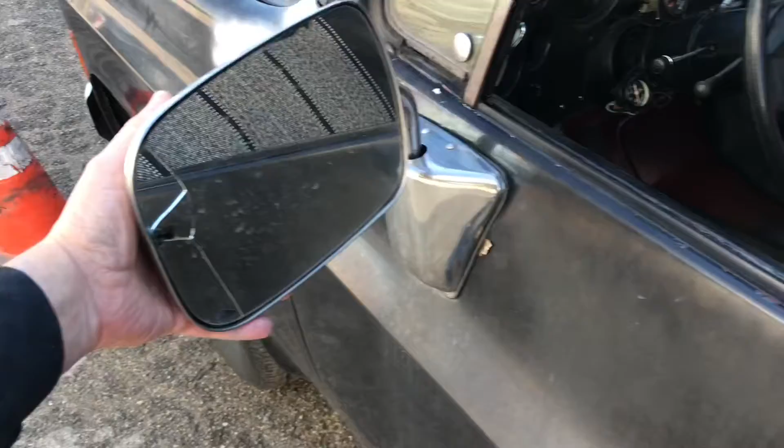Get this sucker back in, wired up properly, and test it out for shimming. Alright, let's record the back of my head.

I remember, did I take all this off up there? I probably did. Let's see. I think I can do this one.

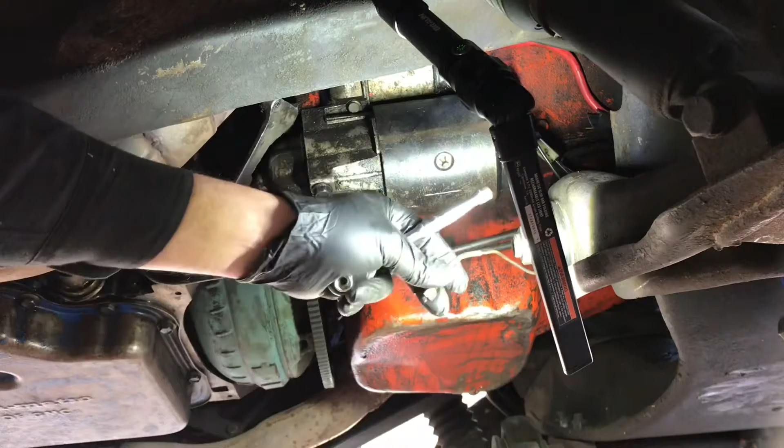There's the wrong wire I did. So this is the one we're not using. This is the resistor wire, we're just going to cut that. Apparently I don't need it. Allegedly you don't need it. And we'll see. Well, we shall see.

Look at that, nice. Alright, those two are off. The one I can't get to yet, so I will drop this first.

Transmission lines need to be adjusted. See, this got the nice knurled. Where's the lens? You see how they got a nice knurled, of course you can't see it, it's pitch black. Right here is knurled, so it's, they do that for a reason so they stay tight, I think.

This sucker's quite a bit heavier. Oh, I think I left enough. Yeah, I can get down here to take everything off. That's the best way to do things, leave enough wire for yourself to do stuff. Fuel tank was the same way. I should have done it this way. There's enough hose.

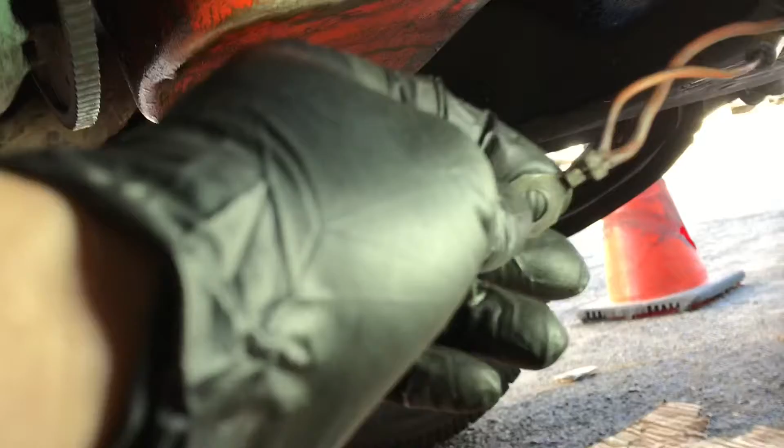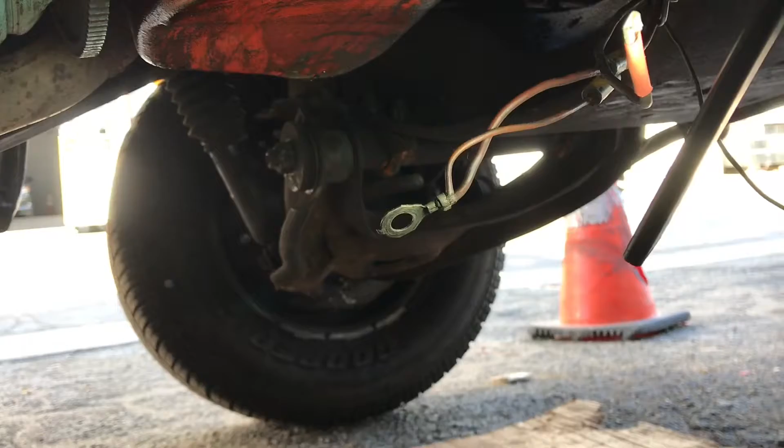Alright, that's on there. Oh, I gotta shrink it still. I've taken this off so many times. And look at this, it's with fusible links. That one is barely hanging on. So I'm gonna crimp on a new terminal there, so I don't do this next week. No start. Alright, let's bring the thunder, as they say.

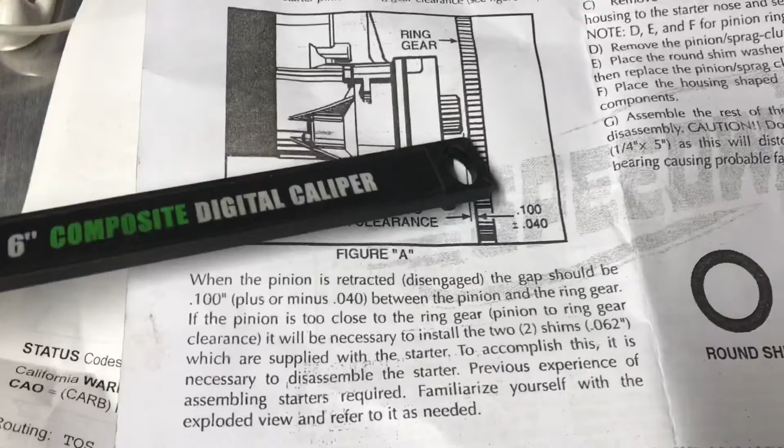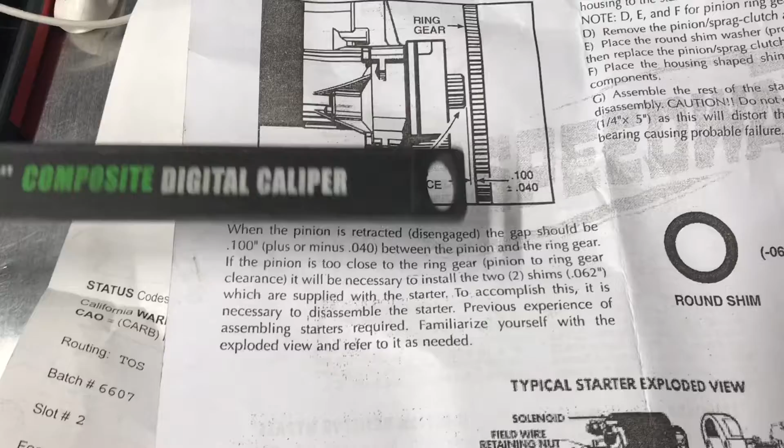I'm going to make another shim out of that piece of aluminum I got. Well, I was hoping I wouldn't have to do this, but my clearance between here and the ring gear is a little bit bigger, I think it's 0.10. If you measure it on here, 0.100 plus or minus. I don't know, maybe it's. I'm going to shim it because either way, the gear's coming all the way out to the end of the flywheel. I'm going to look at another install video.

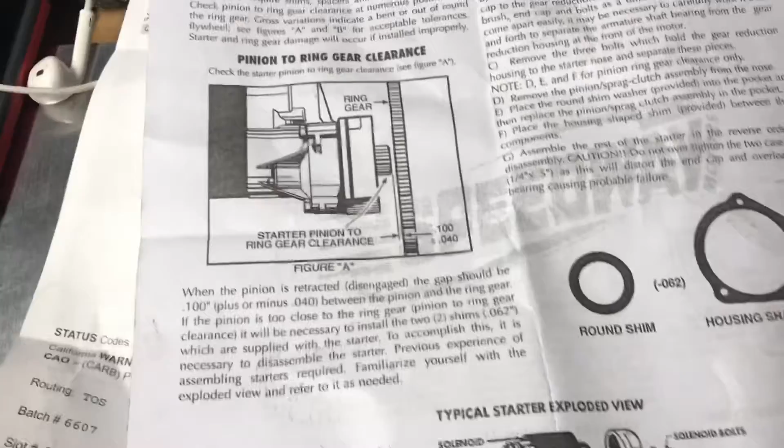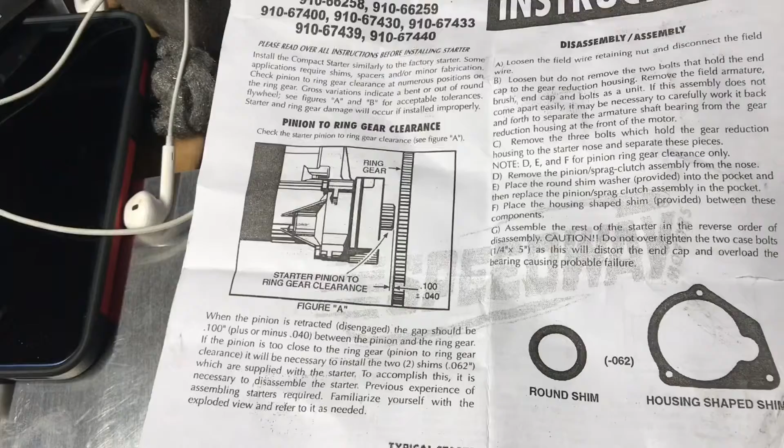You don't want it to be fully engaged like that, and it sounds like mine's hanging up. So I'm going to do that first because I want to do that first and then do the other shims anyway, I just jumped to these. I put in almost 0.17, 4.3 millimeters, that's a lot of shims.

So that's not right, way too many. So let me try and throw these ones in. I'm going to take the starter apart to do that. They go in between here. They give you a slew of them. 1, 2, 3. I don't know if these are any.

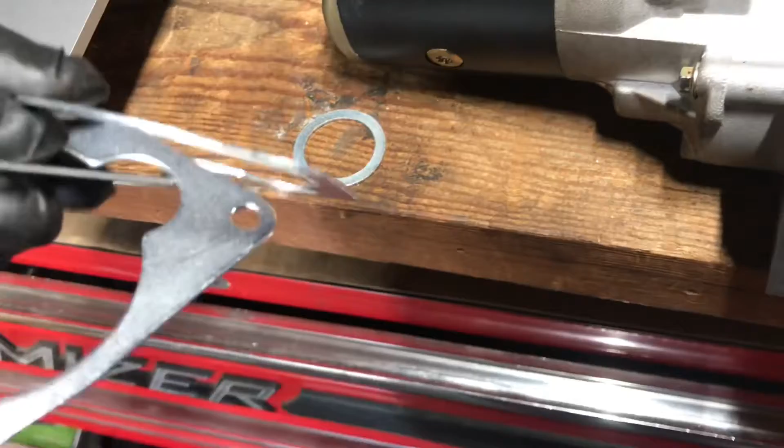Are these all the same thickness? Yeah. Another video said 1 and 1, round on both. Let me see what their notes say. Remove the 3, remove the pinion. Place the housing shaped shim.

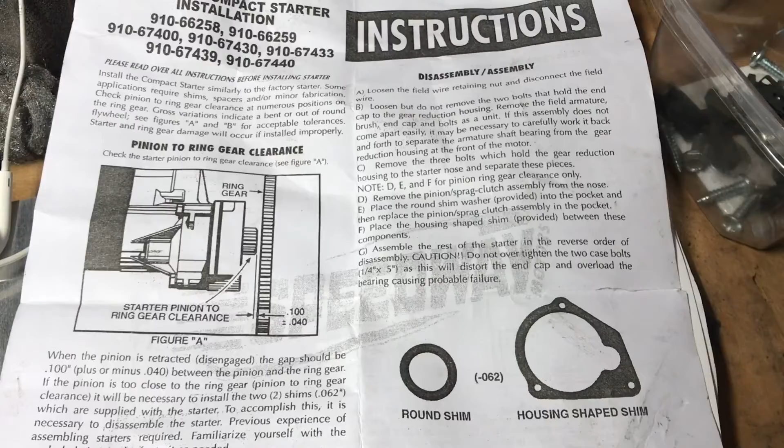Yes, 1 shim maybe? Okay, alright, let's see what this does. This is how awful these instructions are. It's telling me to loosen these bolts and pull the armature out. There's no reason to, I just need to get to this section. So nothing is touched there.

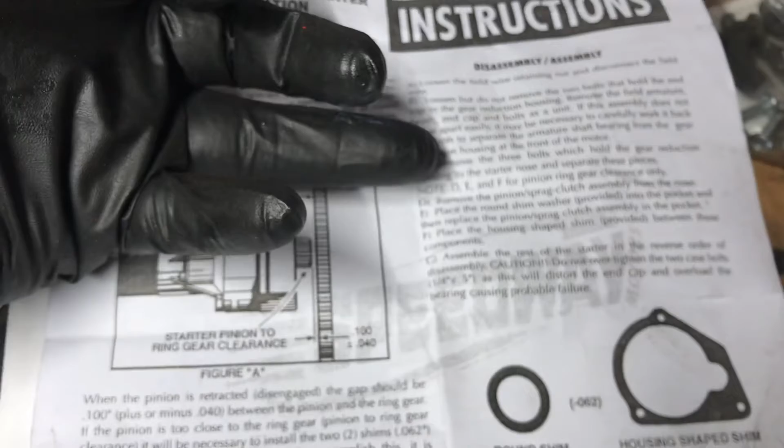I'm putting in a shim right here. There's already one there, they want another one, and then another one here. But if you read their instructions too, they want you to take the gear reduction housing and pull out the sprag clutch and put it behind there. Well, if I pull that out, it doesn't fit behind there. There's a bearing and it's not the same.

These people... but I watched a competitor's video. Yeah, they're just doing this one and this one.

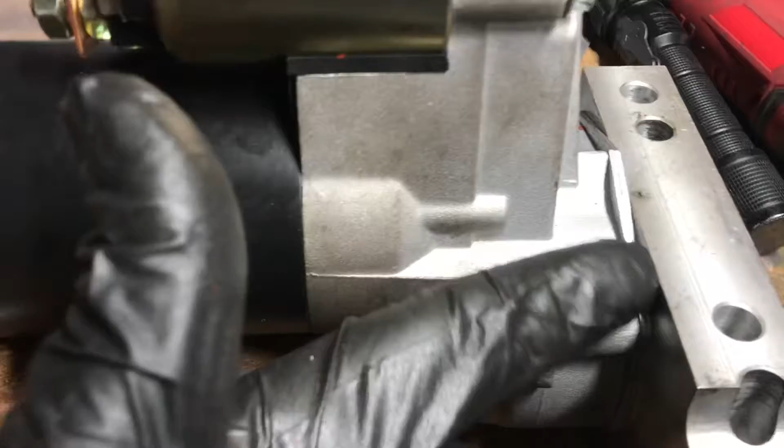That's all the way out for me. Before it was coming right to the end, now it's getting hung up like that. Should it stay there on its own? They're saying to pull it out, and then they want you to check the gap.

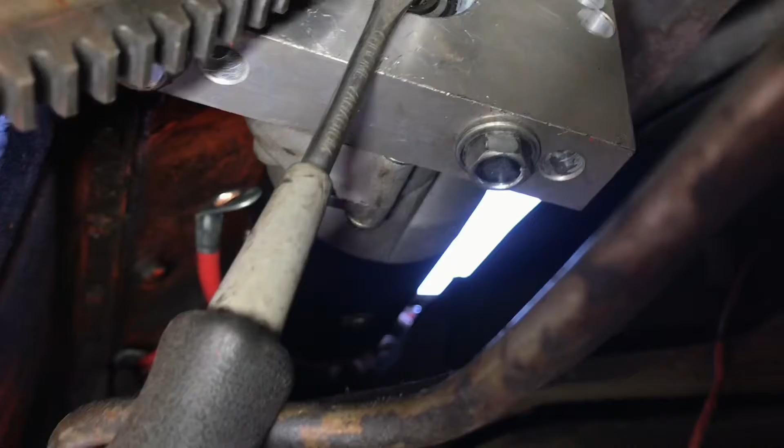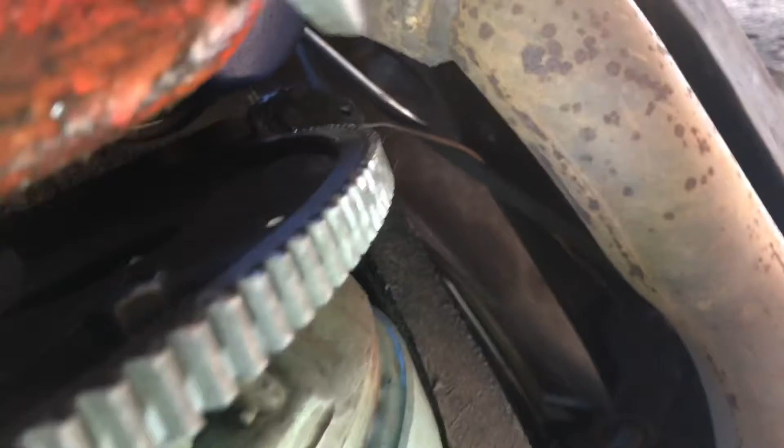In there it should be like 10 thousandths, they said, or one other site has you put a paper clip. I don't like how that... I had to watch how hard this is to get into gauge. If it comes out at an angle here, see if I can do it. It kind of hits the flywheel, and I've already done a couple teeth damage shimming this.

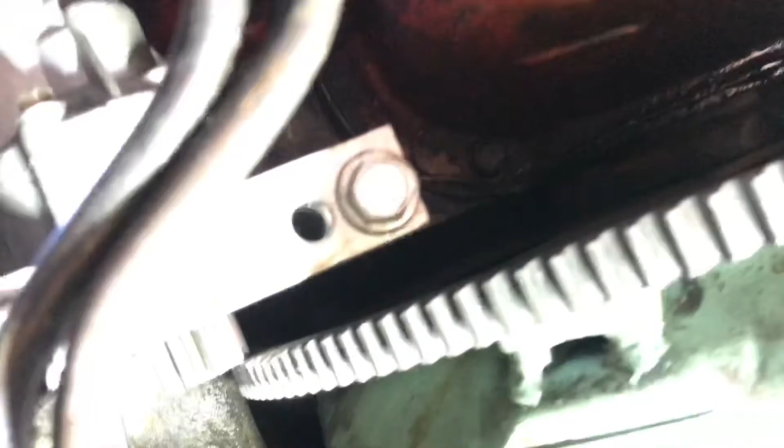So let me, I don't like that. See that? Clink. That's, I mean it's gonna come out spinning. I guess that's the idea.

Let's see, I've never had to deal with this. I feel like that's gotta go. If it comes down, it's going to be away from the flywheel more, huh? I think that's what it is. When you're shimming, you're adding shim.

Let me rotate you guys, sorry. When you add shims, because where it is, you're right on the 3 o'clock position. You add shims, you're coming down to like 4 o'clock. Am I correct in thinking that?

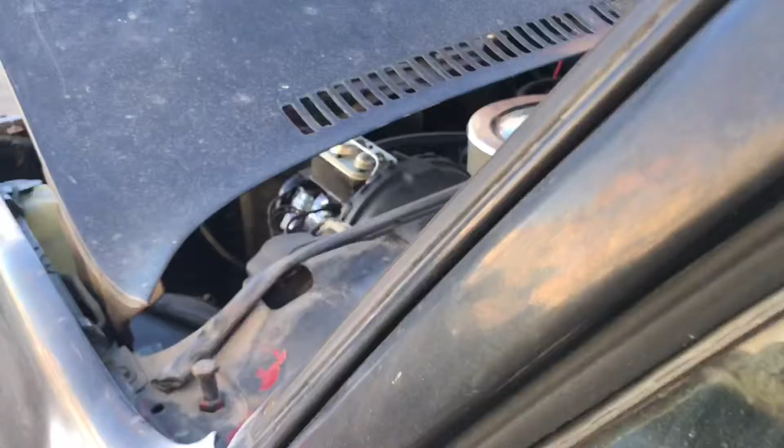So I can't take any away. There's no shims right now, and it's right there. Let me put in 1 shim, see what happens. 1 shim. Alright, 2 shims. No shim.

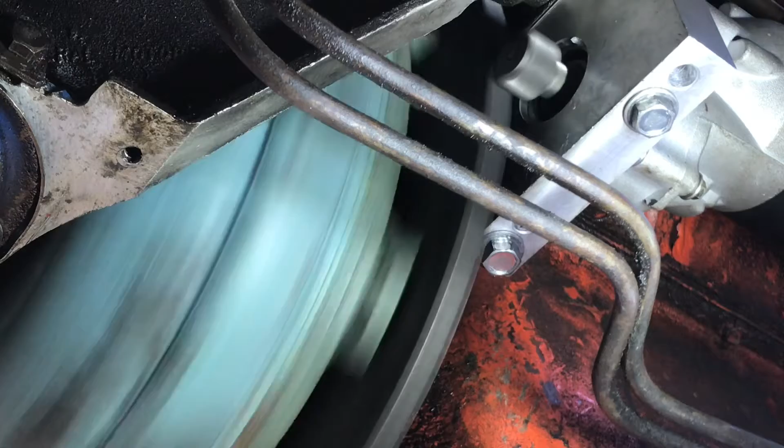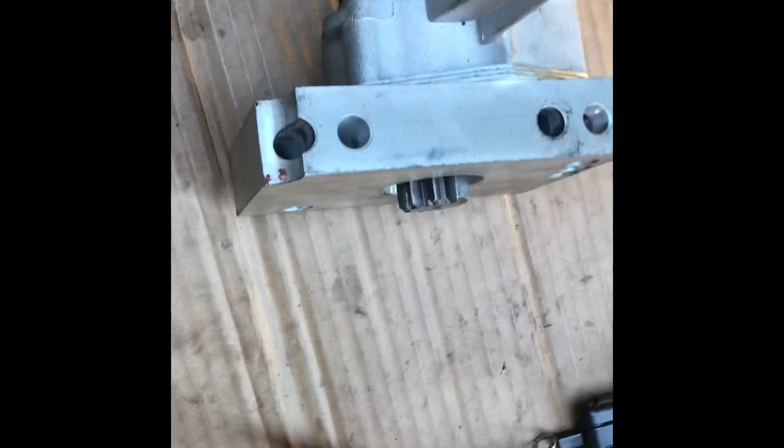Okay, I'm gonna roll a little video. Got 3 shims in there. One more shim in here. Had on stock, added 2 now, plus the circle inside. And because we still were coming out too far, I think. So let's see, straight shims, just

Depth shims. Be one straight shim. Good boy. Two shims. Yeah, how about 3 shims? All the shims I made. It's just as thin.

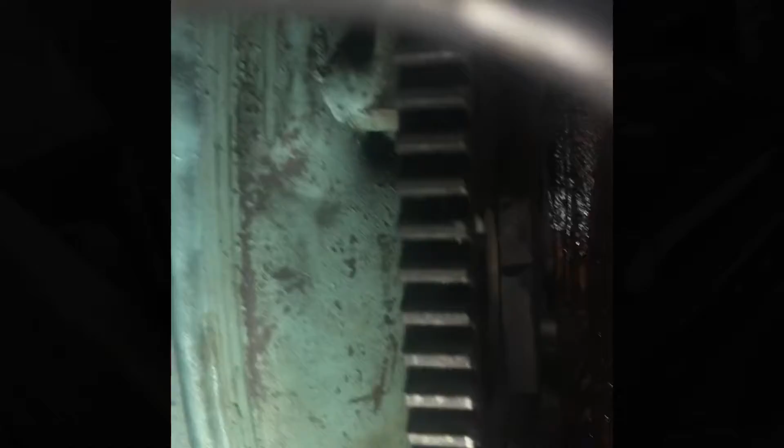Let's see, the way this is drilled, I think the whole starter has to go that way, in my opinion. So when you kick this out, so I can do this. No matter what you do, it hits. And I'm bringing it down as far as it'll do.

A ton of shims. Should it sit there by itself? Come down, I need it to be like down here. Way down here would be less engagement. That doesn't make any sense though now.

And look at it, I keep adding, that still comes out the same. I added a ton of shims here. Mechanism there, and it still comes out as far. It should be coming out. Maybe it only comes out to there. I should roll video, see how far it comes out. Yeah, let's do that.

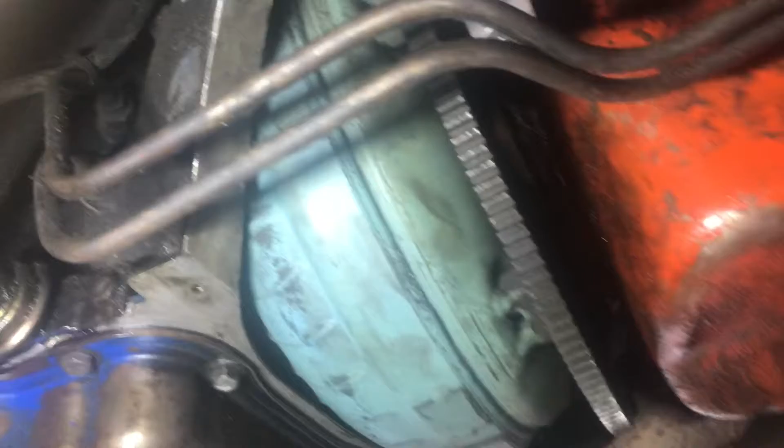I don't know, I've done starters many times in my life, never one of these high torque things though. Usually you throw a couple shims in, you're good. It seems to be getting hung up. It's coming out, it's not retracting once it's running. My flywheel does have a little wobble to it.

If you guys notice that, is that going to cause that? It seems like the starter's not retracting. I think it's just momentum. It has that sprag gear, kind of worm gear that comes out, engages, and then once it's running it's supposed to kick it back.

Seems to be coming out into the teeth enough. I think I got that shimming right. I got so many shims in there, you can't go any further. Let's see if you see. There's that, and right there. That's way too many shims. Way too many.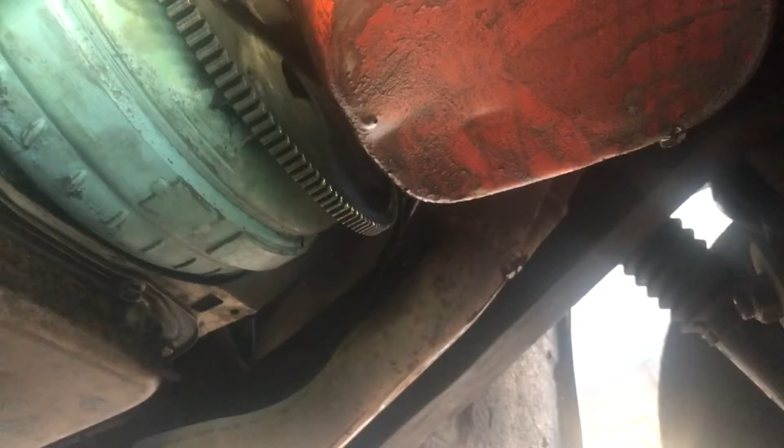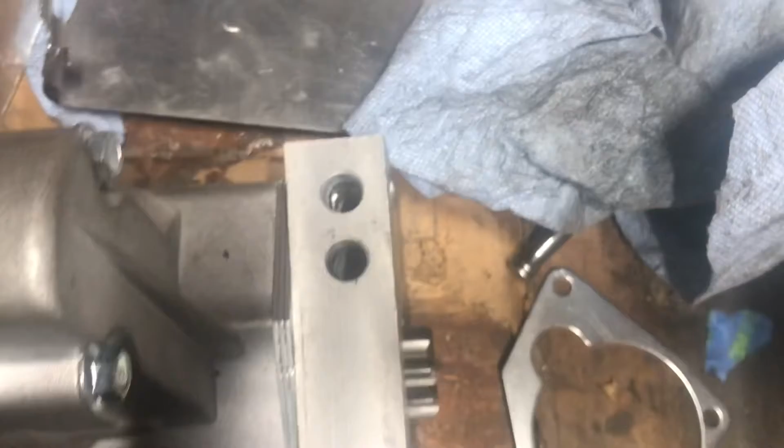Oh boy. Could be something, I'm just saying it seems like it's going to come over. Starter's up in there, it's going to come away from the flywheel. And that would be the opposite side. See how these are shadows, Jesus Christ. Looks like it was supposed to be drilled over here more.

It's definitely got a mark over here on both of these. Is that just the way it is? I don't know. Well, let's see, if it was drilled, that would give me more clearance into the flywheel though. I want out of the flywheel.

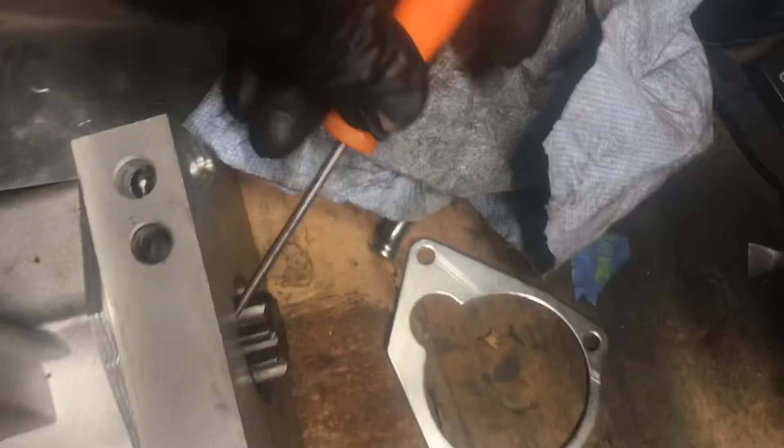Because she's coming out, I just put jumper cables to it on the ground and it spins, comes out, spins, comes out.

Wiring in my truck, would it hold it up? That R terminal wire I left off? No, that's just a feed for the coil.

Yeah, losing daylight again, probably be putting the other starter right back in. Oh, jeez.

Old starter sitting on the floor, needs a hammer. Ay, ay, ay.

Old starter on the battery charger. Wait for it. Old starter on the battery charger in the 50 amp start position.

Jesus Christ. Old starter rapped on the solenoid. It works, video.

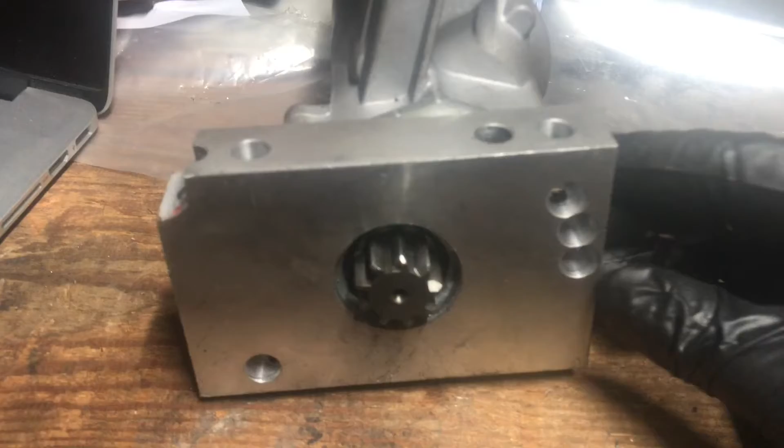Well, I don't know, the old one doesn't get hung up. But we do know this is coming out. I think it's just in the wrong position, it's got to be like a hair over. And by shimming it down, you get the curve of the inner curve of the flywheel. So it starts here and you bring it down, you're getting further away from the ring gear.

But I have it down like twice as thick as those shims right there. Even, I got a lot, way too much. They used to make, I had one, I cut a piece of aluminum, and then I had the shims that came with it. And it measured out to, what did I tell you, 1.7, 0.17, and I think I even went thicker than that. That's not a shim, that's a wedge. That's 4 millimeters, when we know what a 5 millimeter socket looks like.

I do kind of remember GM's having a thick shim though, but my starter didn't have it. Obviously, I had the diagonal bolt pattern too.

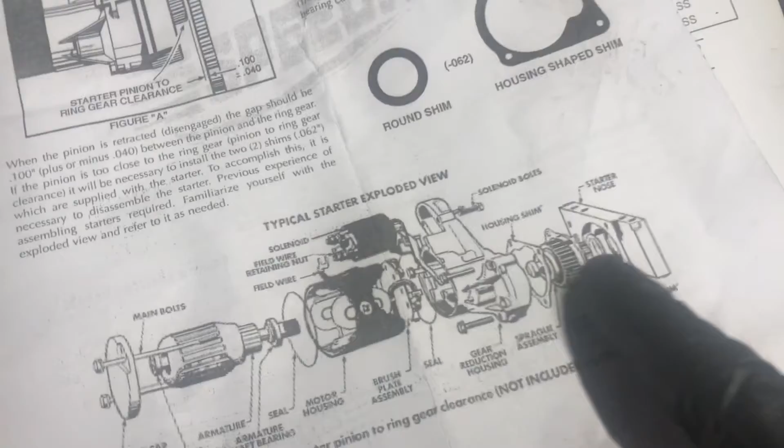Totally forgot to mention, I was on the phone for 40 minutes with them on hold, just wanted to go over their awful instructions. I told you, you don't need to take the armature out, all you had to do was take this end off, and they clearly state that in there. And then they tell you to take the gear out here and put the shim behind it. You can't, the shim goes in front of it. It's like...

I don't know, bought some stuff from before from Speedway, but that's my honest opinion.

It's just not in the right position, it's got to be further down on the curve of the ring, because it's getting hung up on the return, it won't kick back in. And you can pull it out and put it into the teeth and feel that. The flywheel's kind of almost at an angle.

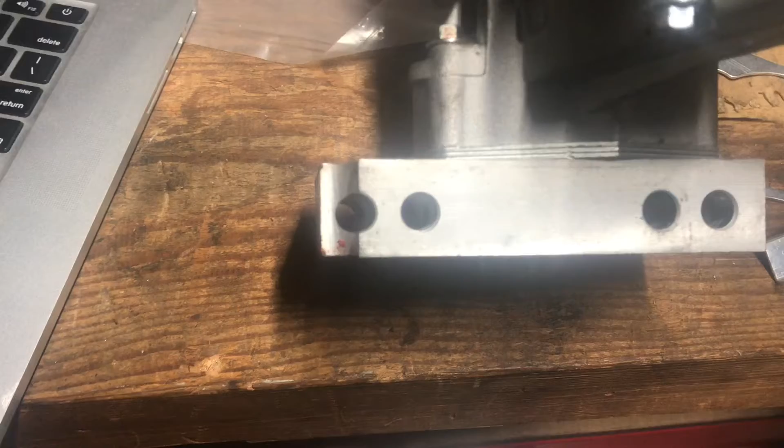It's like, are these holes? My holes were drilled in the block, I had the one original. Maybe if that one's in the wrong position, maybe it's cocked in a little bit. I think it's factory drilled though, they do mention you can drill it yourself. Did somebody do that? I don't know.

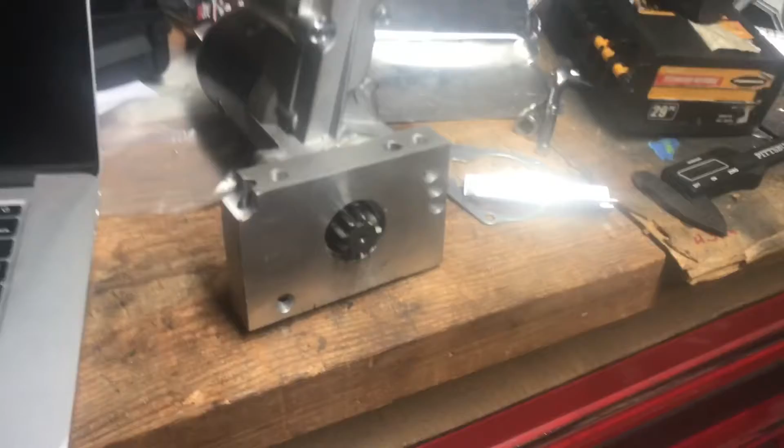Anyway, old starter's in. That's a high torque, the old one anyway, but needs a new one. Maybe I'll email them, send them video and pictures. Say look, I tried to call you but you're not very helpful. Ooh, let's see what they say to that.

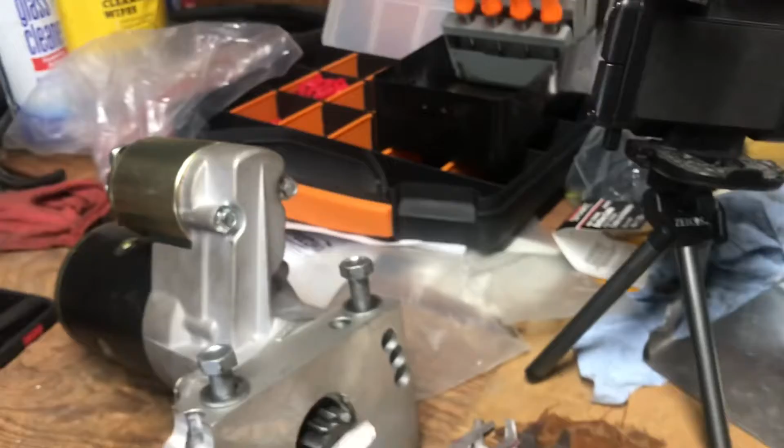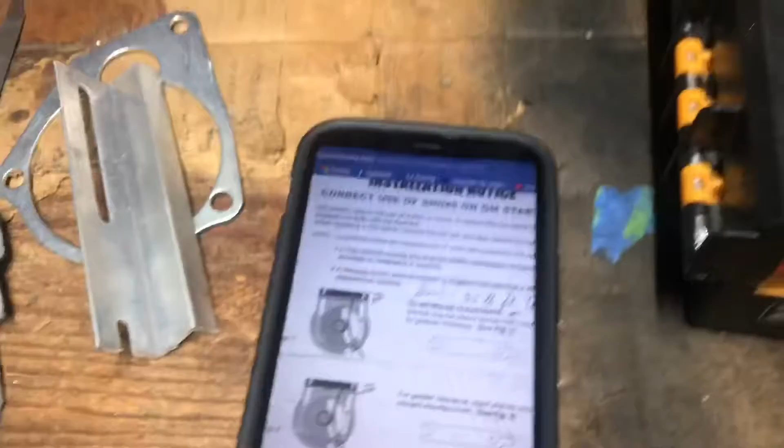What we're gonna do is, I found this little tidbit on the internet, let me see if I can find it for you. But something I never had to do in all my years of shimming starters was making a half a shim. This was on some Chevy nerd website. It says full shim there, that's not my issue, I need a half a shim, like that.

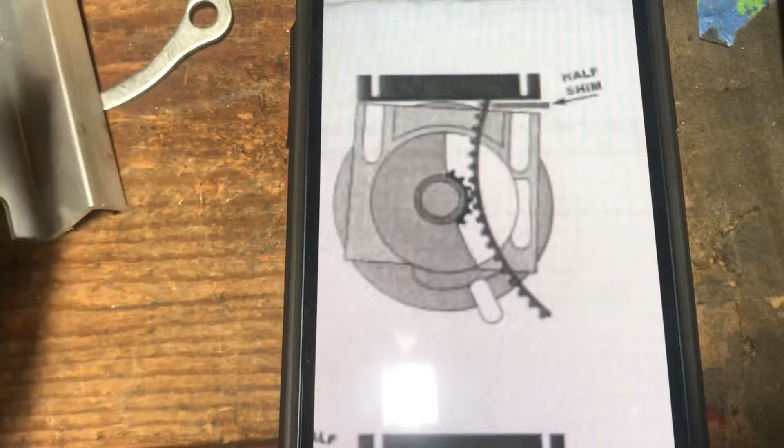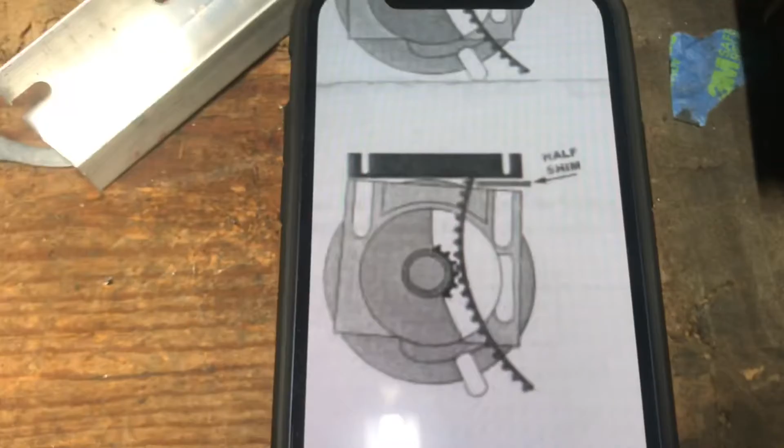I need to bring it away from the ring gear. That's what I was trying to show you guys yesterday with that curve. Now I don't like that because look right there, that's not a good seat for the starter. But I mean, if you're dealing with a fraction of an inch, you might be able to get by.

The right thing to do, which I might end up doing, is cutting down. Let's see, I need to cut down this side. No, I need to make this go like that. So I would cut down a little, ever so much here. But I'll probably shim it and see what it does first. Let's not get crazy here.

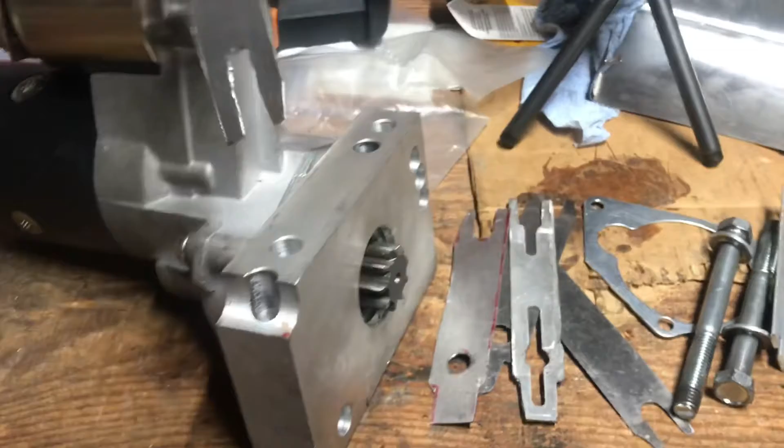Jesus Christ, what a pain in the ass. I guess I'll tape a half a shim there because there's no way to, this is the inner one. So maybe I'll just tape it on there so it doesn't move.

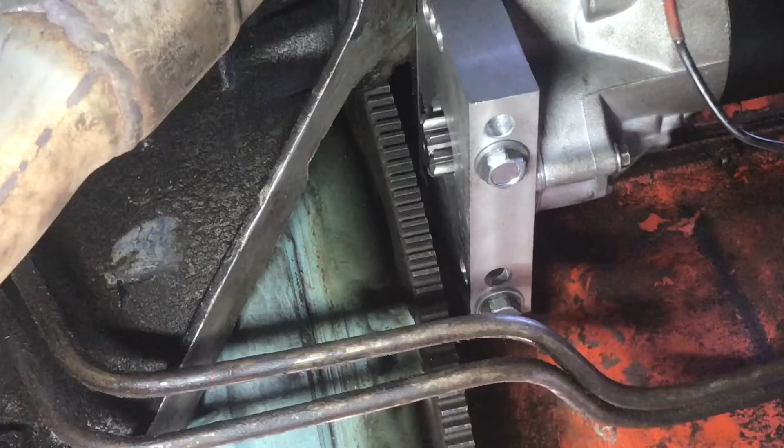Alright, okay, this is one complete shim and one half shim on the inside. So it's walking that out. Pulled it out manually, check the clearance with a paper clip, which is what they say. I'm a little loose, if anything. You stick that in between the gears with a nice little slot that's made.

Alright, I'm going to try this. Oh! Got the classical music playing to relax me. YouTube will probably flag it, saying you can't have music in your videos. I'm sure fucking Bach is turning over in his grave.

Alright, here we go. Still sounds like shit, that's nice. Still sounds tight, right? Let's see what the video showed us, if anything.

Alright, now for this bullshit test, what do I do? 2 half shims? And it's pretty loose, it doesn't go in all the way, but at least we should know it's not hanging up now. Let's see what this sounds like. And I put some grease on there to see what the hell the pattern's gonna be.

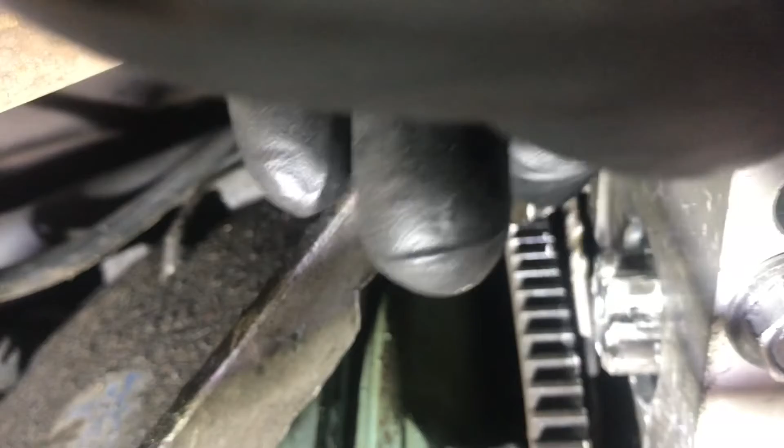Well, that shimming clearance coming down feels better now, but it still sounds like shit. The only thing I can say is this is supposed to be an 1/8 of an inch according to their specs. So I'm going to take one of those shims out again, or maybe 2, maybe 3, maybe all of them. But if you throw this out manually, it's going to go way out here, which is what they don't want. So I don't know, I'm just going by their dumb instructions.

Well, I got the proper clearance. I stuck this paper clip right in there. I got the right clearance. Pull this back in. I have the proper... where the fuck's the camera? There it is, 1/8 inch.

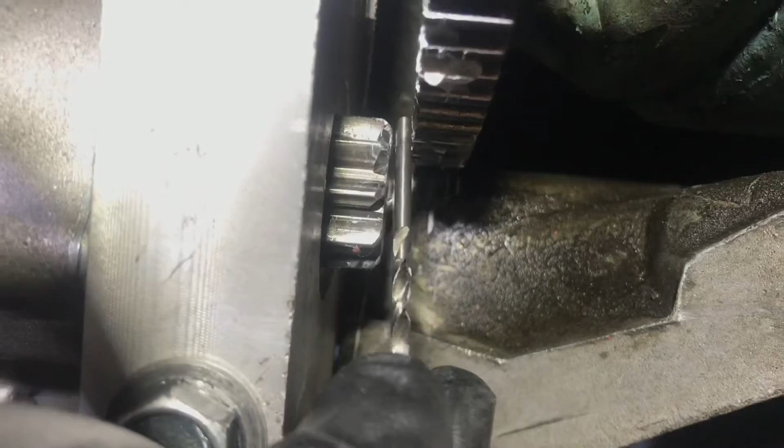It was too tight. I took out one shim and it puts it there, so it's a little loose. But everything's spot on and it's still making noise. So I don't know what to tell you. I don't think I'm going to be using this high torque starter. I guess that's the end of this story.

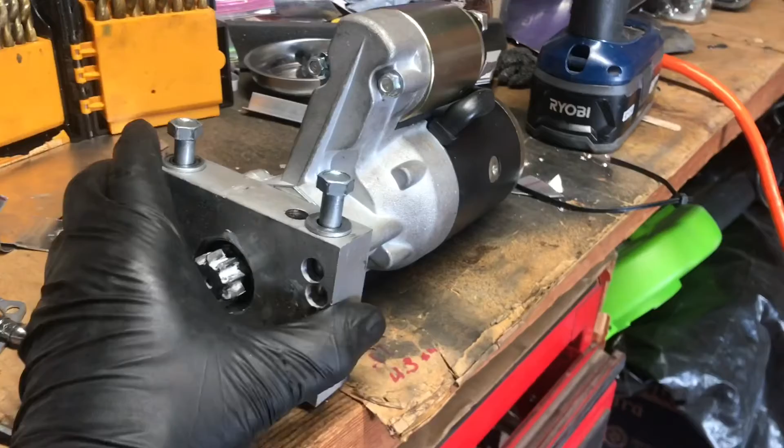So as far as the starter goes, I'm running out of time to deal with it. So I'm just going to hold on to it. This engine's not staying in this truck anyway, probably, so maybe I'll try it on the next engine. Maybe by then Speedway will get back to me. They still haven't called, it's the next day, still morning, but still. Maybe I'll check my email, I don't know what was going on. Maybe that's that wobble in my flywheel. I don't know, anyone else have any ideas? Let me know if you've dealt with these mini starters.

I did the half shims to walk it out, but I don't know. And then I had all my measurements the way they wanted it. You got me, open to comments and suggestions. Thanks, guys.

I'm a glutton. I'm a glutton for punishment.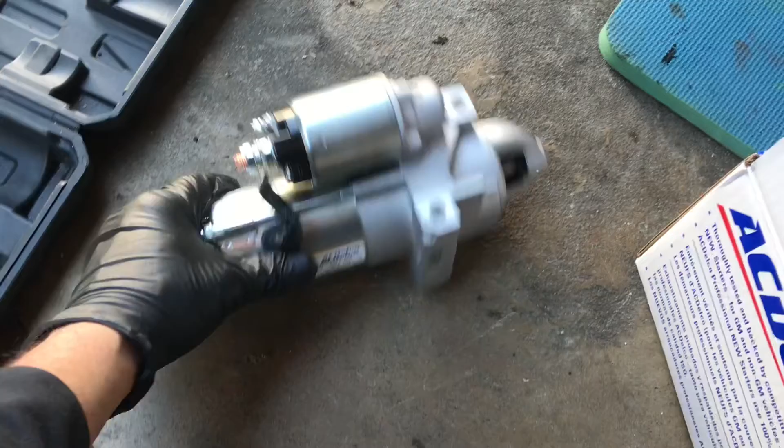Let's try a 98 350 starter. Angled pattern, it's got a nose cone. Maybe it'll be a little more forgiving. According to the instructions, they say no shims required.

Look at that, they give you new bolts. Like I said, it was a 98 Chevy, part number I think I googled 337-1022. Man, that's blurry, I'm trying to help you guys out here. Yeah, brand new, not a reman. Alright, let's try our luck. Factory GM.

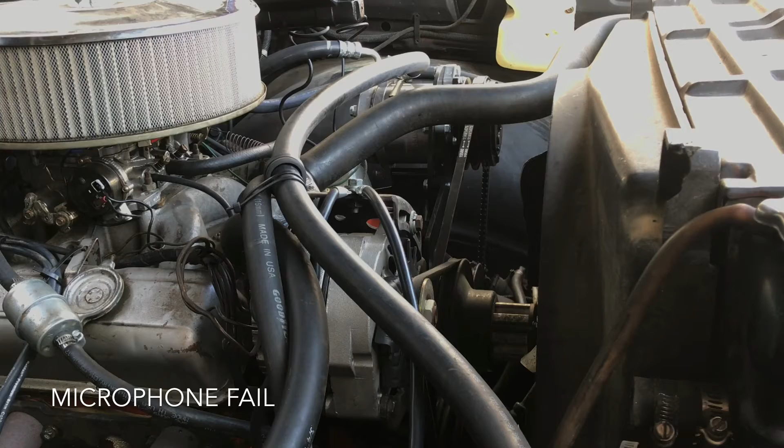Voila! Alright, let's keep this rolling. One take wonder, maybe I can edit. So we got rid of the oldie, put in the newie, I told you, the 98 vintage mini gear reduction starter. I keep calling them mini starter, gear reduction starters they are. So yeah, that thing, no shims, fires right up.

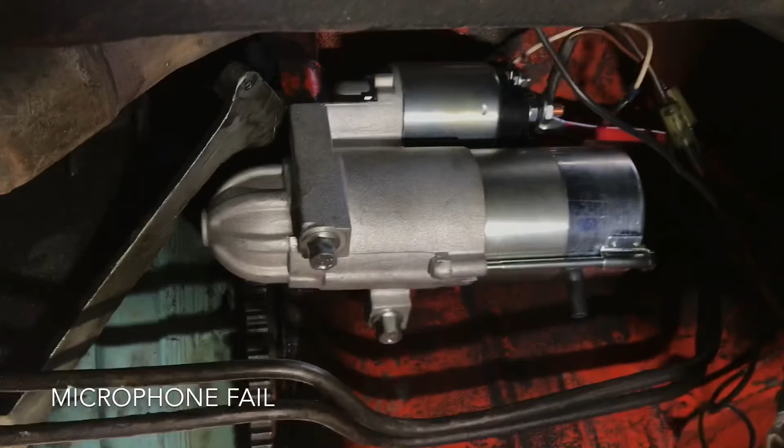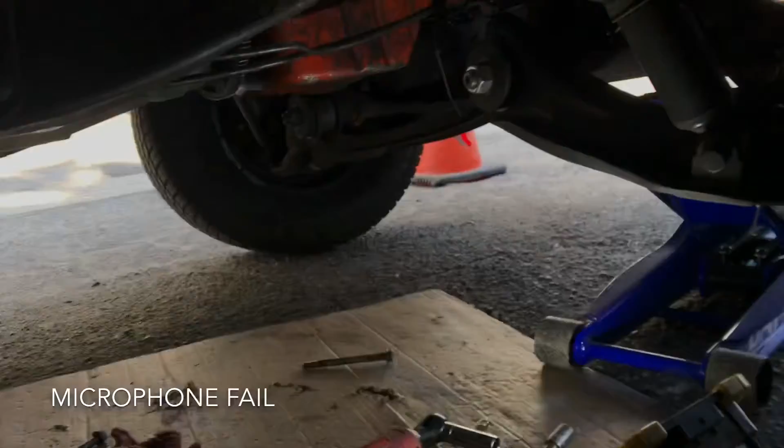So this was 98 bucks. I spent $100 on that Speedway one that I still haven't heard back from them 4 days later. I've already returned it, so I don't know. They're dead to me. I need to fill this video in.

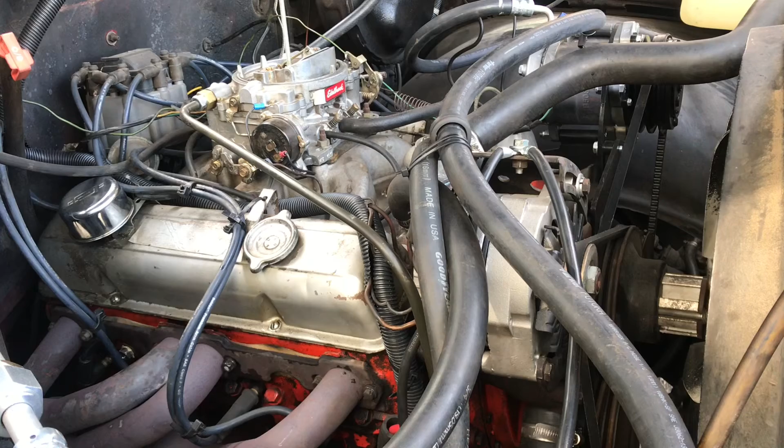I never got a good recording of the new starter. Sounds nice, let's hope it recorded.

Alright, I'm getting better at my heat shield construction. I learned to cut it long and curl the edges like that, that way you get some strength. That's a lot, it's like a C channel now, a lot of strength there. And let's see, oh, and of course you got to put the...

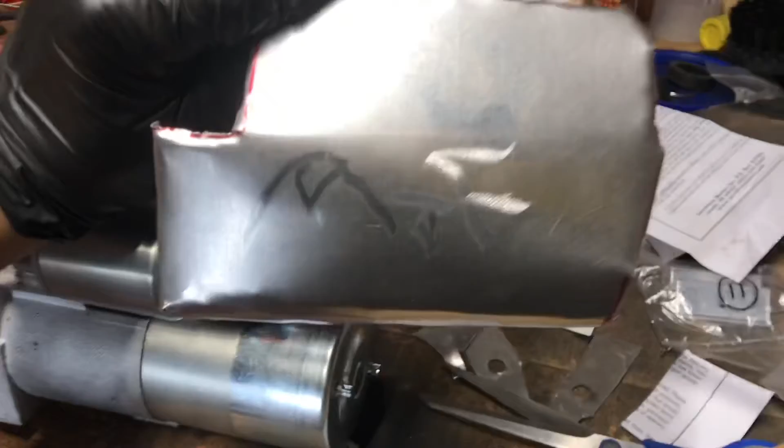I don't have a logo yet, but how about that, MikeTheFixer? I'm just going to go over here and notch that out nicely. It's going to fit right there and go on one of the solenoid bolts.

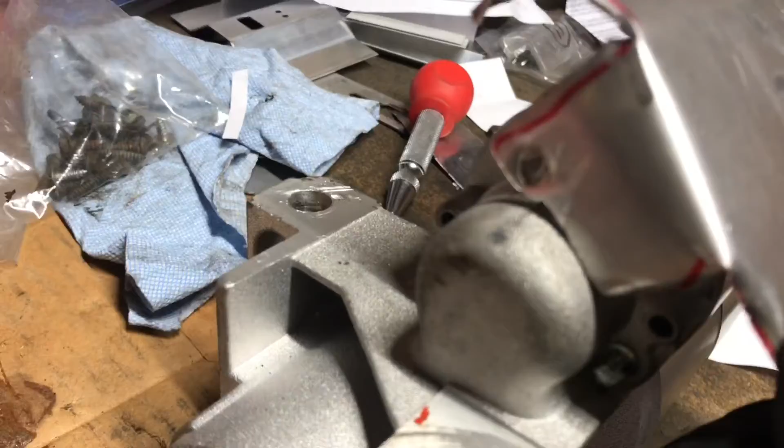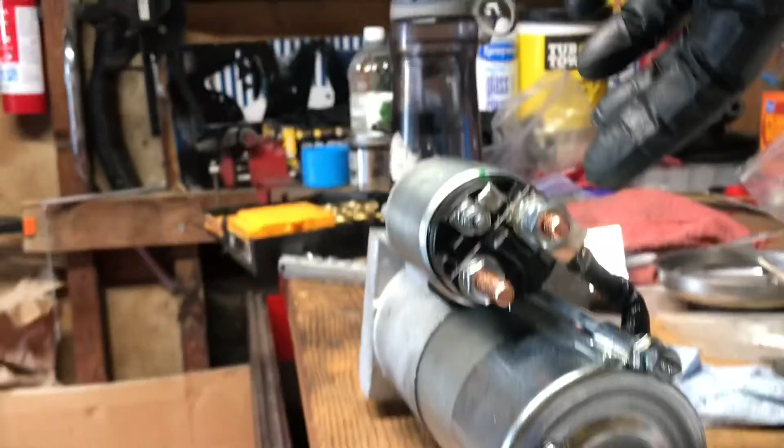I've test fitted up in there, and room for my cables are on this side now. The other starter, they were on the floor... no, the other starter, they were on this side. So they're going to come out this way, so I had to leave some clearance for that.

And I think I'm going to put a ring terminal back. I just had a jumper lead before. Go back to the ring terminal and put that back together. There she is, folks, all bolted up in there.

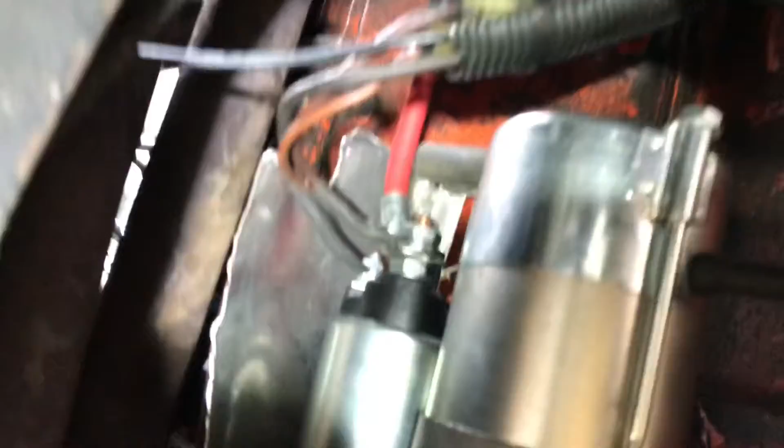Spin you... why is this, is this out of focus? Is it just me, I don't know. Anyway, I'm doing some wire loom too, you know, do the right thing, put the wires in their proper place. And I'm going to go up top and clean that up.

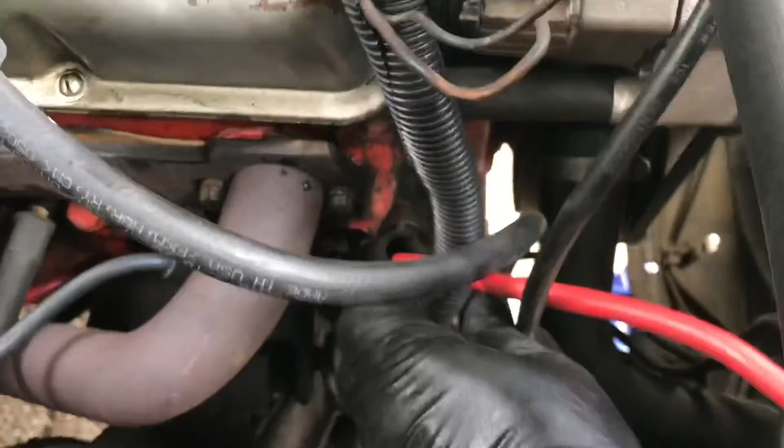Okay, Bluetooth microphone failed. So what I was saying was just running the loom up here, I'm going to tuck all that in nice and neat.

That starter is returned, we'll hopefully get a refund. They better not say it's electrical. Don't try your luck, stick with the factory starters, you can get them dirt cheap, same money.

All right, hope this helps somebody. This is very technical, just going through my diagnosis process more than anything. So I hope that helps somebody, and we'll catch you soon. Lots to do.